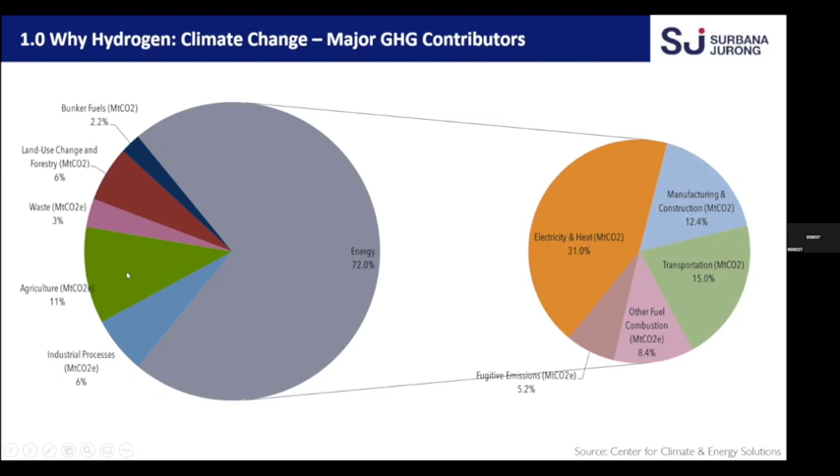Moving forward, if you see the GHG breakdown, most of the energy is consumed by industries, and within industries - sorry, one second. Okay, most of the CO2 is generated from industries basically, and then also a little bit from agriculture, which is also a significant amount of CO2 being generated from the agriculture side as well.

If we leave the problem like this, CO2 generation will keep increasing, and by 2050 we will be in a position to reach up to 50 gigatons of CO2 equivalent, which will exceed the 1.5 degree temperature rise we are targeting for. So hence we need to be below that. What we need to do is take more greener options to lower CO2 emissions.

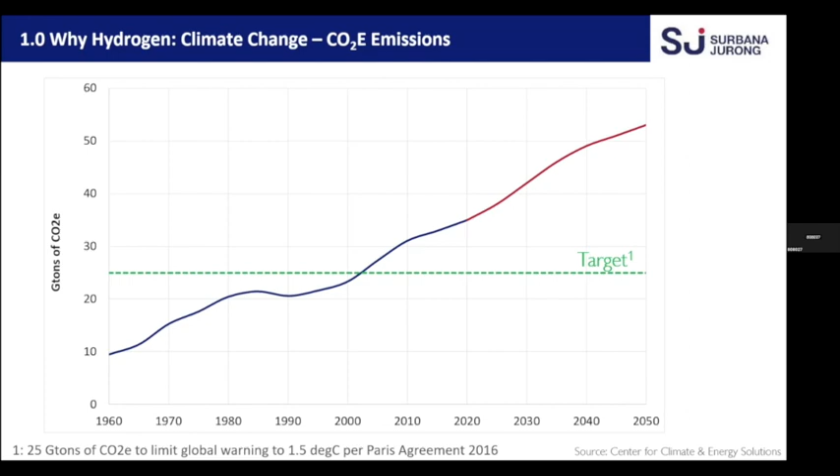How can we do that? We can reduce dependence on fossil fuels, shift to zero carbon sources - mainly solar, wind, batteries, and so on. We can also use energy efficient technologies, minimize the use of energy - basically optimize the use. For example, nowadays people carry a couple of cell phones; instead of that, you can carry one. So we have to be using energy more diligently. Then we can also use carbon capture and storage solutions to overcome the problem.

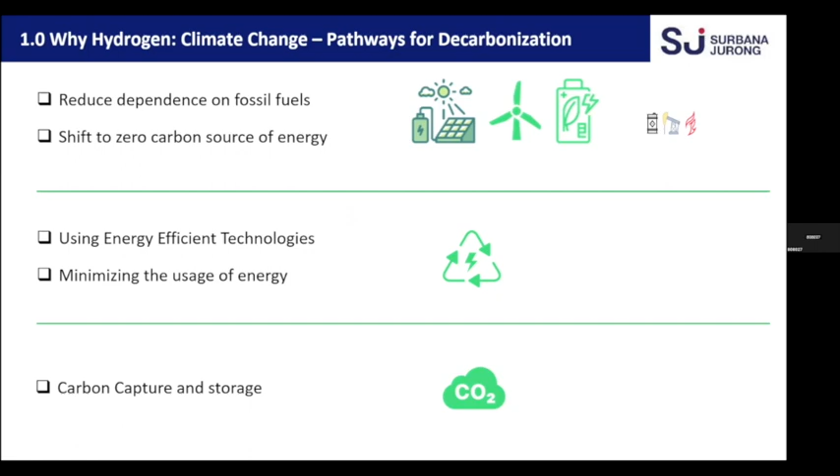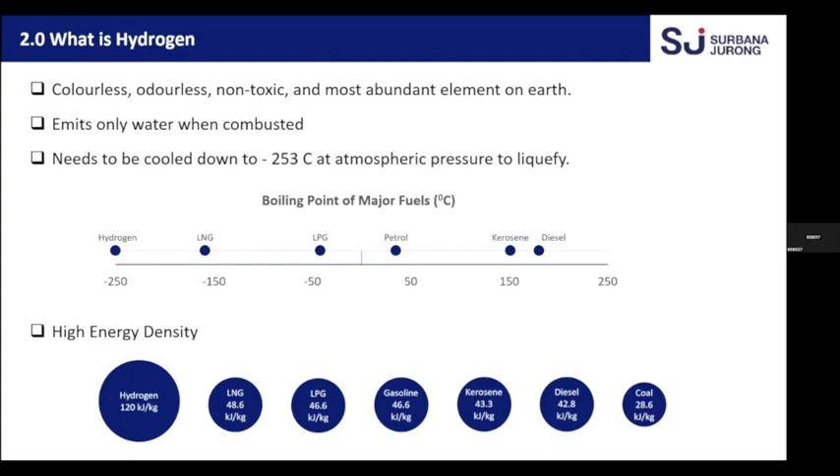Next is, what is hydrogen? Hydrogen is colorless, odorless, and non-toxic, abundantly available on Earth. It only emits water when combusted, and it needs to be cooled down to minus 253 degrees Celsius at atmospheric pressure to liquefy it. Typically, hydrogen has a high energy density compared to LNG, LPG, and even coal. However, because it is very light, you need much higher volumetric flows to achieve the same amount of power production.

So hydrogen demand, mainly, I have classified into 4 different sectors. One is transportation, which Michelle will be talking about. The second is chemical and industrial applications, stationary and power generation applications, and then integrated hybrid energy systems. You can see which areas will be driving these needs - for example, in chemicals and industrial applications, cement and steel industries are bound to take it up, along with industrial heat and biosynthetic fuels. From the power generation side, we see hydrogen combustion and reversible fuel cells coming up. We can also look into integrated or hybrid energy systems - nuclear or hydrogen hybrid, which gives a much greener solution, and hydrogen blending into natural gas systems and so on.

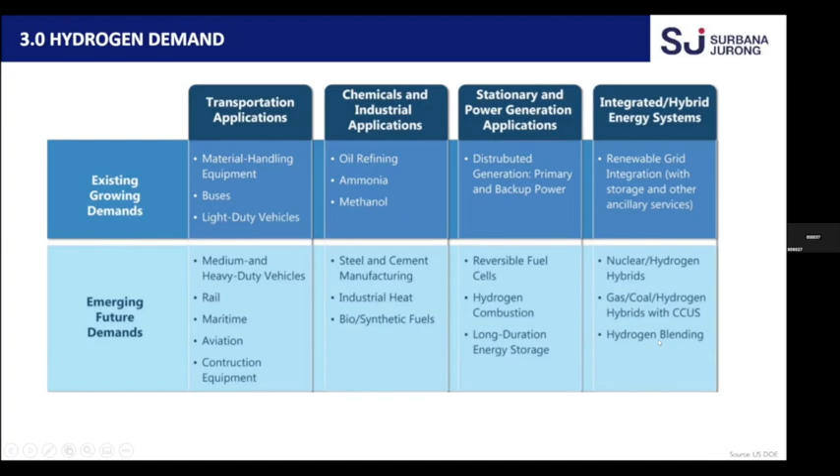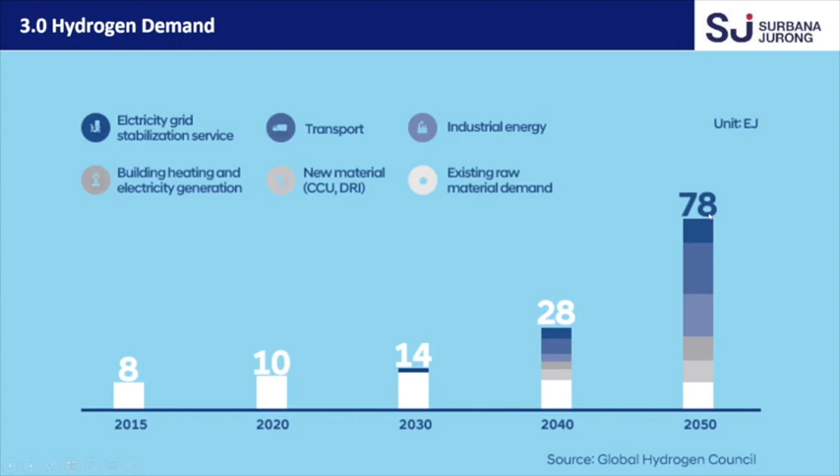You can see in 2015, this demand projection given by the Global Hydrogen Council - initially it was around 8 exajoules, which is 10 to the power of 18. It is expected that consumption will increase from 2015 to 2050 by roughly more than 9 times.

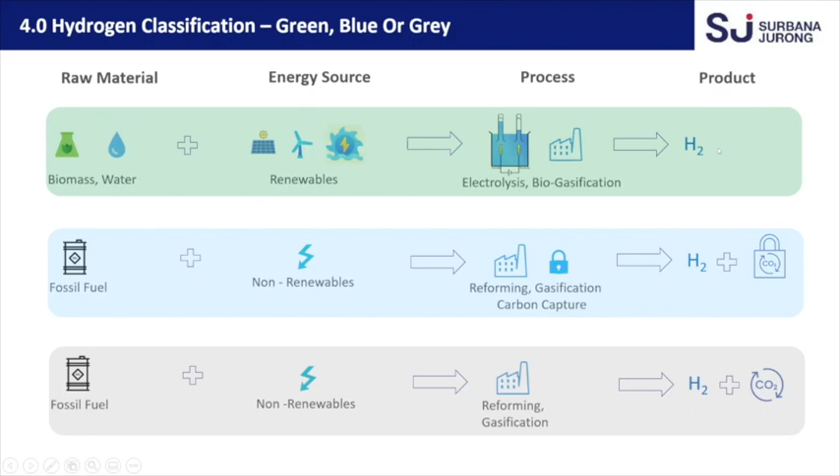Then hydrogen storage, whatever hydrogen you have generated, we can store it as a product, which is liquid hydrogen or compressed hydrogen. Or we can also generate ammonia or LOHC, or even look into adsorption on solids.

And the fourth one is hydrogen transport. Hydrogen can also be utilized for hydrogen transport challenges, which is liquid hydrogen carried using ships, tankers, trucks, and pipelines.

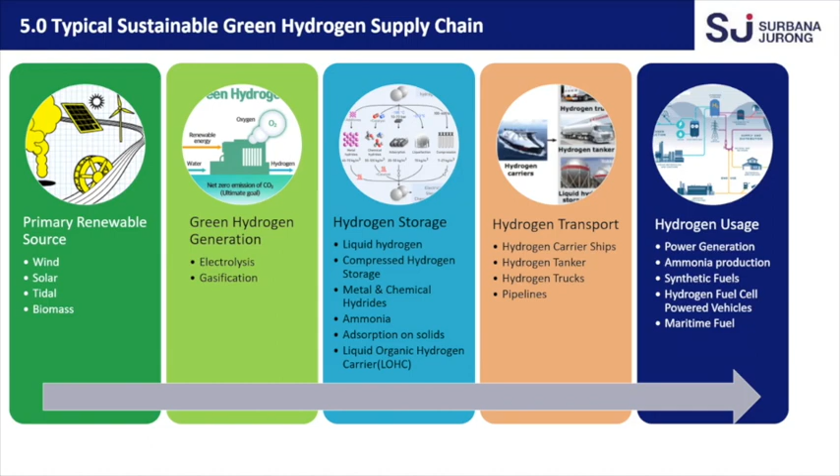The last one is hydrogen use, which is power generation. Hydrogen can be utilized for power generation, ammonia production, synthetic fuels, or marine fuels, and so on.

So if you see the current hydrogen production trends, it is mainly developed from SMR and also naphtha reforming, and you will see some percentage from coal gasification and very little on electrolysis.

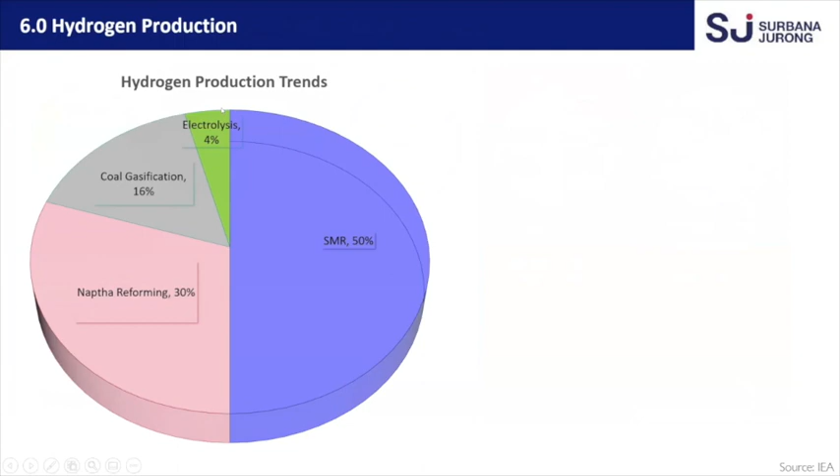But for us to move to green hydrogen, the green part that you are seeing here, which is electrolysis, needs to be a bigger one.

So this is also one of the data which I picked up from an IEA. This is where you will see the cost of hydrogen production when using power from a grid can be almost nearly $5 per kg of hydrogen. And when using renewable energy, it can be lowered to nearly 3.

And when using natural gas without CCUS, it's also around 2.5 or 2.2. Then with natural gas and CCUS, it's slightly nearly $2.5. So this all again depends upon location and where you want to put this plant. There's quite a lot of factors associated with it.

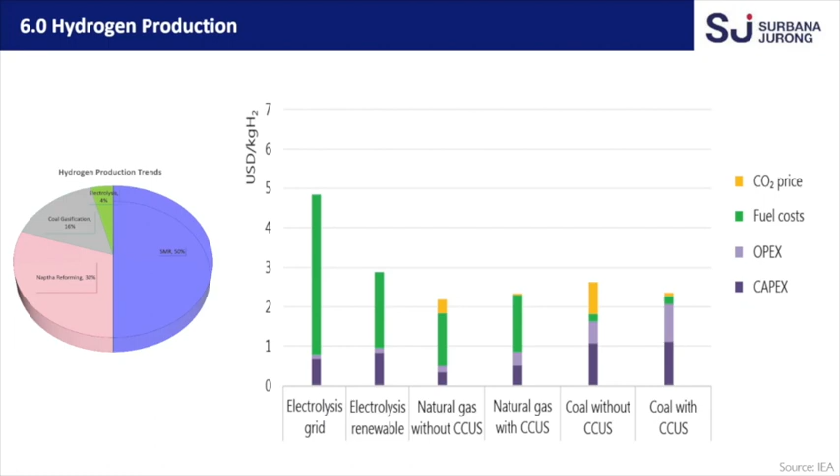Here are the differences between blue hydrogen and green hydrogen. You can see that by 2030, people are expecting that most of the hydrogen source will be more than half from blue hydrogen, whereas green hydrogen tends to start and increase. By 2030, blue hydrogen is also almost 3 times.

This first one is a planned scenario. The second one is a transforming scenario, meaning this is more optimistic, and this is a pessimistic scenario.

So here you can see it can go as big as 3-fold, and even the green energy started building up. By 2050, the pessimistic scenario stays at the same level, but there will be a slight increase in terms of blue hydrogen. Whereas the optimistic scenario, green hydrogen can potentially go to almost 6-7 times the planned scenario.

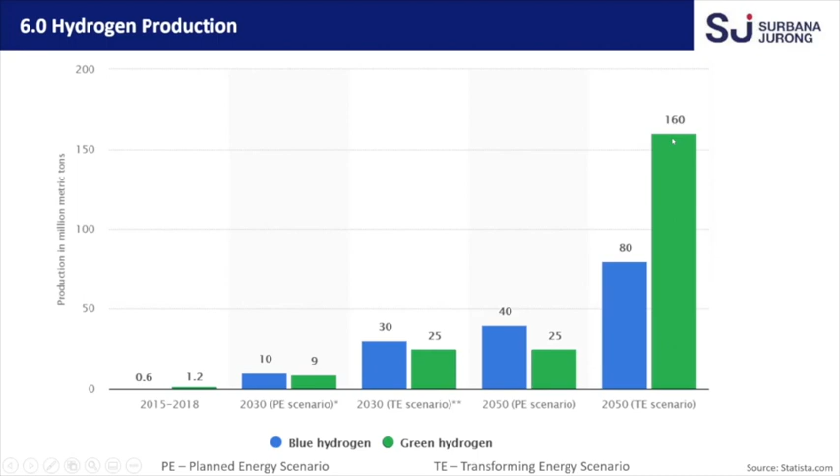Green hydrogen mainly comes from electrolysis of water, or also biomass or waste gasification, whereas blue hydrogen comes from natural gas conversion with CCUS or coal gasification with CCUS.

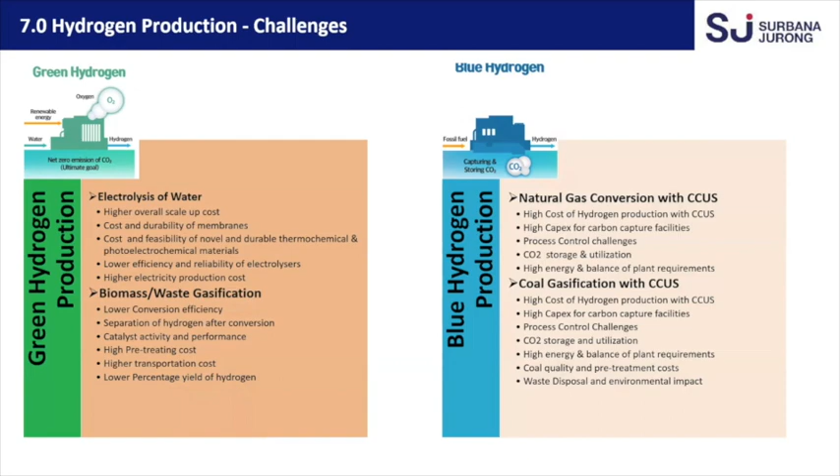What are the key challenges? Currently, hydrogen technology, in terms of storage, faces quite a lot of challenges, because storage tank sizes are limited to 2,000 to 10,000 cubic meters only, because vendors are not yet available to produce at the scale equivalent to LNG, which is around 180,000 scale.

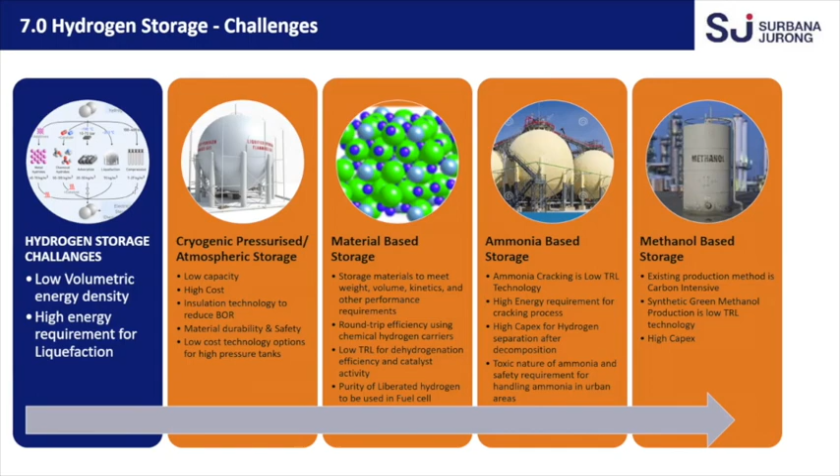Then we have hydrogen transport challenges, the same thing. Ships to carry such a huge amount of hydrogen are not yet in place. Only quite small amounts are being transported from Australia to Japan currently, and we foresee that there's still around 5 to 10 years to come to the level where large volumes will be transported at a bigger scale.

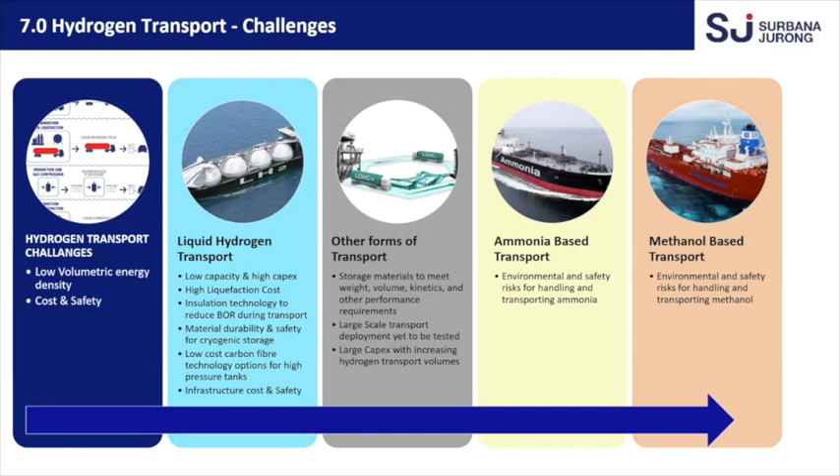So quickly to summarize, hydrogen can be utilized for power generation in CCGTs. The technology for CCGTs using 100% hydrogen is being tested now, and it will be commercially available from 2025-26 onwards from various vendors.

Then we are also looking at fuel cells for vehicles. Although the technology is quite mature, the capex and footprint are still some of the challenges for vehicles.

On the maritime side, the cost of hydrogen is quite high, so maritime is not quickly coming up with this type of solution. Even for storage and transportation, it is quite challenging.

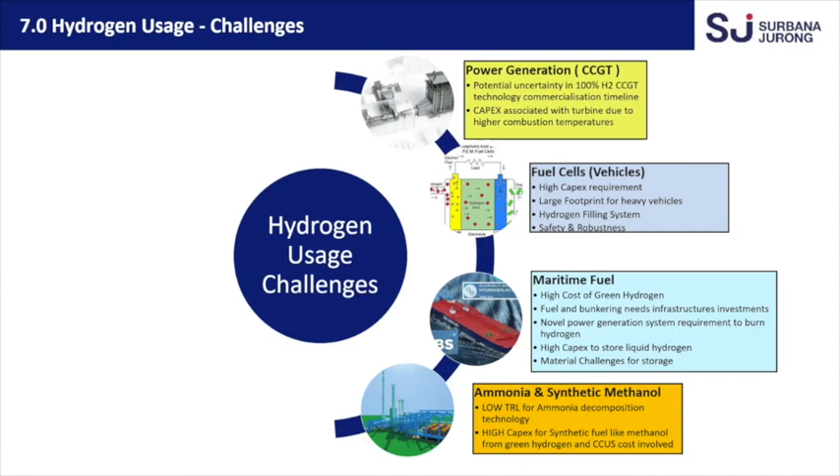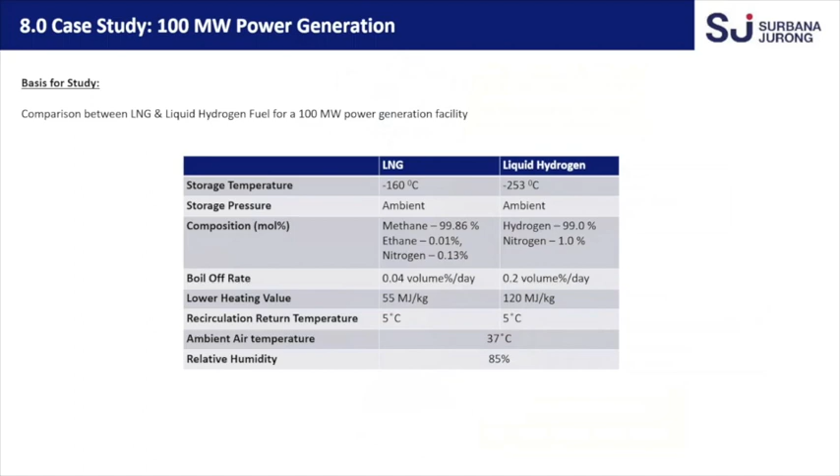A quick case study we have done: a 100 megawatt power plant, in which we looked into the jetty infrastructure required, the storage requirements, recirculation, high pressure pumps, vaporization, and cold energy harnessing, and then the CCGT powering up green data centers. This is a project we have conceptualized.

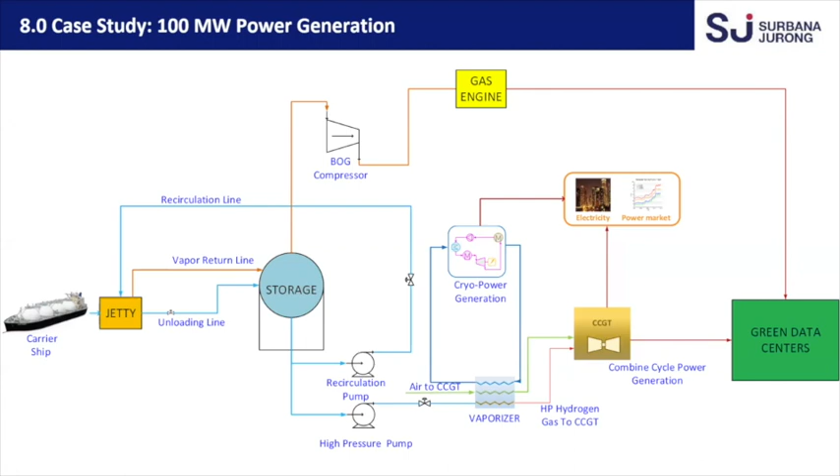The storage volume required to achieve the same 100 megawatts via hydrogen is almost twice that of LNG. And the cold available with liquid hydrogen is quite higher than LNG, because of the very low temperature of minus 253 degrees C.

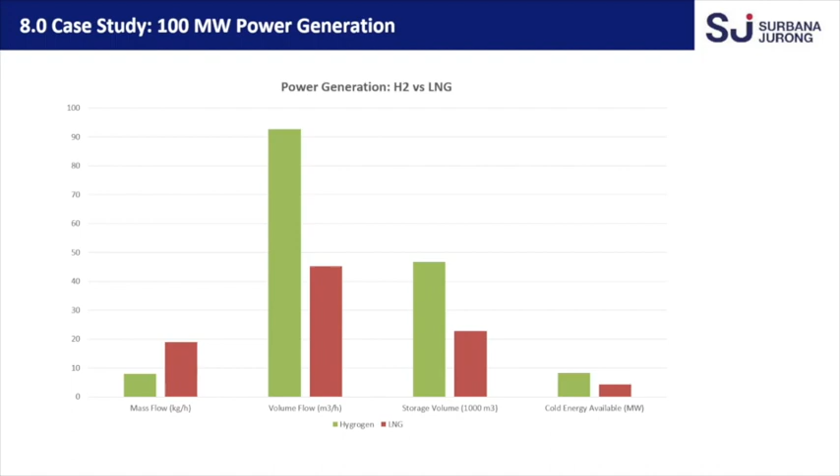This will give a good idea: let's say one ship of LNG carrier of 160,000 meter cube - this is equivalent to roughly 2.5 ships of LH2, liquid hydrogen, comparing the energy equivalent to one ship of LNG. This is also equivalent to 1.75 ships of ammonia. This is an equivalent comparison.

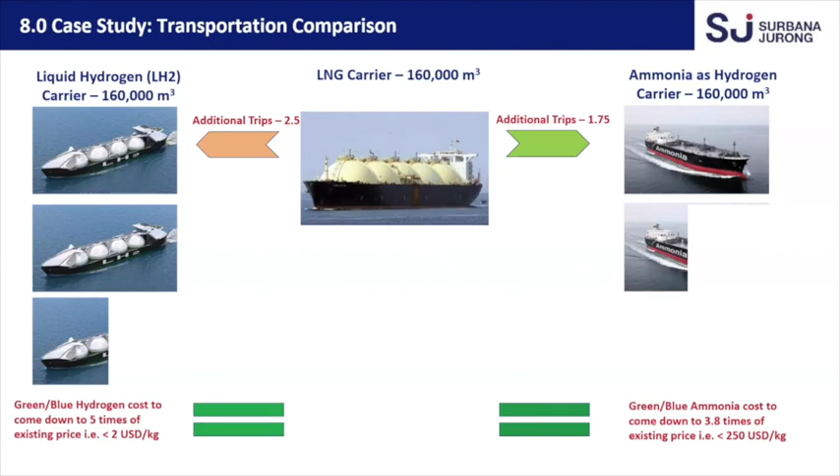Process safety considerations: we believe hydrogen comes with quite a lot of process safety issues. It's highly flammable, but burns with an invisible flame, and has a wide range of flammability - it can explode between 4% to 74%, quite a wide range compared to natural gas at 5 to 15.

We need to ensure wherever you are storing and handling, you have adequate ventilation. You also need the right purging requirements - helium gas is recommended over nitrogen. For example, for any refinery or natural gas plant, we use natural gas as fuel gas or nitrogen for purging, but here you need helium.

What are the hazards associated with hydrogen? Fire hazard, explosion, asphyxiation, and cold burns because of very low temperature. The most effective and efficient way to fight hydrogen fire is to ensure the facility is designed inherently safe to shut off the flow of gas, and use dry chemical powder to extinguish the fire.

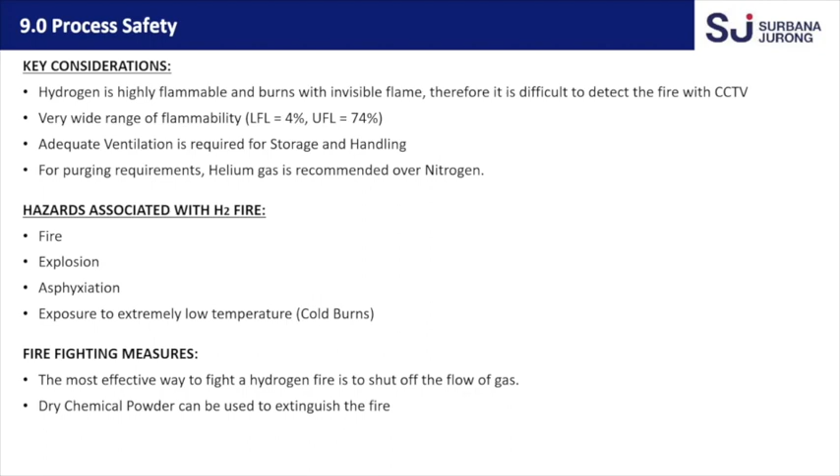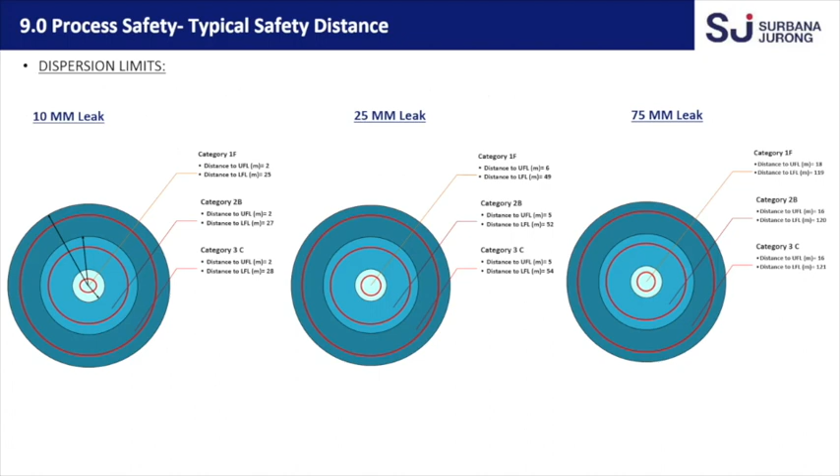We have also looked at dispersion analysis, done with a 10mm leak, 25mm leak, and 75mm leak to see the safety distances or HSSC buffer zones needed. We see it can go as low as 2 meters to 120 meters - almost similar to LNG, because hydrogen being lighter, the flow is going vertically upwards.

Thank you, I will be taking questions later.

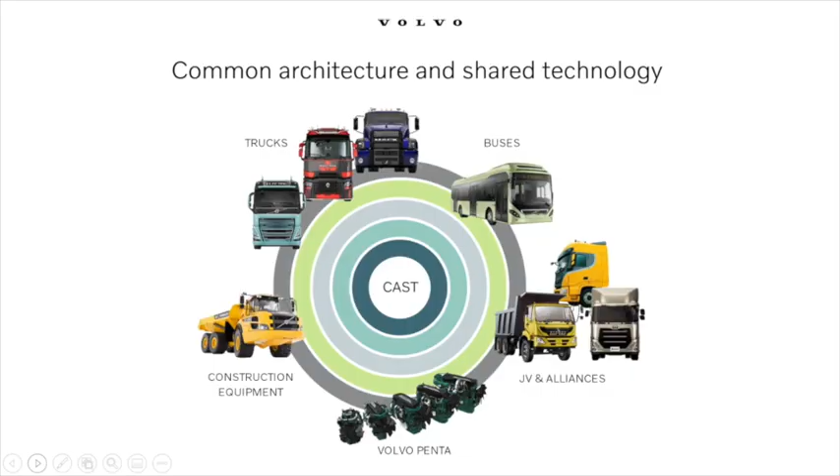But certainly hydrogen and fuel cell technology is going to play a strong part in our business as we go forward. We're not a latecomer to the zero emission electric vehicle space, kicking off in 1995 with concept trucks and buses, through to production start of electric buses and trucks in 2022. But I'll touch on our roadmap journey shortly into the hydrogen and fuel cell side of things.

But as far as inter-regional haul goes, heavy transport, heavy line haul, longer distances, and limited access to infrastructure for recharging and refuelling, we certainly see the fuel cell electric vehicle playing a very strong part there for our organisation. We also see potential down the road for hydrogen to be used in internal combustion engines as well, for extremely heavy duty applications.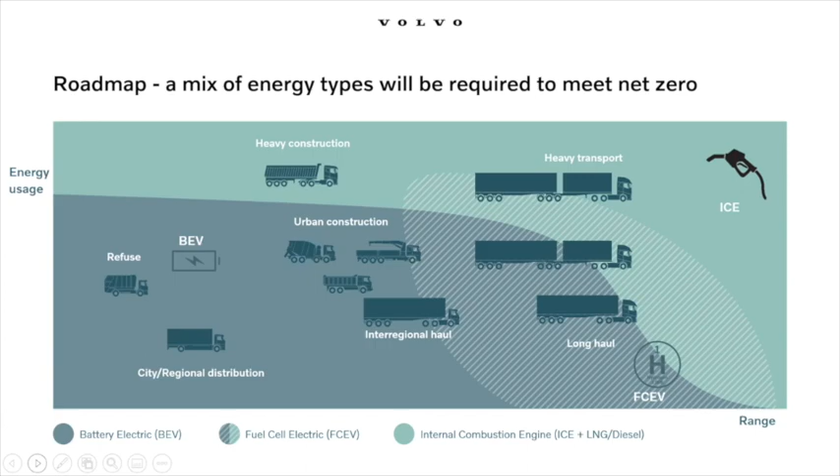That's where heat and weight aren't your friend when you're trying to package up the hydrogen fuel cell tanks and infrastructure onto a chassis to meet particular needs. So we also see internal combustion continuing to play a part hand in hand with new technologies around hydrogen. This is a basic overview of where we see our planning and requirements as we go forward in the long haul, inter-regional, heavy transport space.

We can't package enough batteries on our trucks for interstate transport — it just makes them far too heavy. They won't meet ADR requirements, and they won't carry much of the goods that need to be carried around the country. So really it's the fuel cell vehicles that are coming into play now and into mind.

We project that in that greater than 76 tonne mark, we'll be able to deliver a prime mover onto Australian roads that can go around 800 kilometres, which is around where the requirement's going to be for interstate and intrastate operations. That's really where the sweet spot's going to be — East Coast line haul, B-double running, and other operations around that as well, milk cartage and the like, as outlined here.

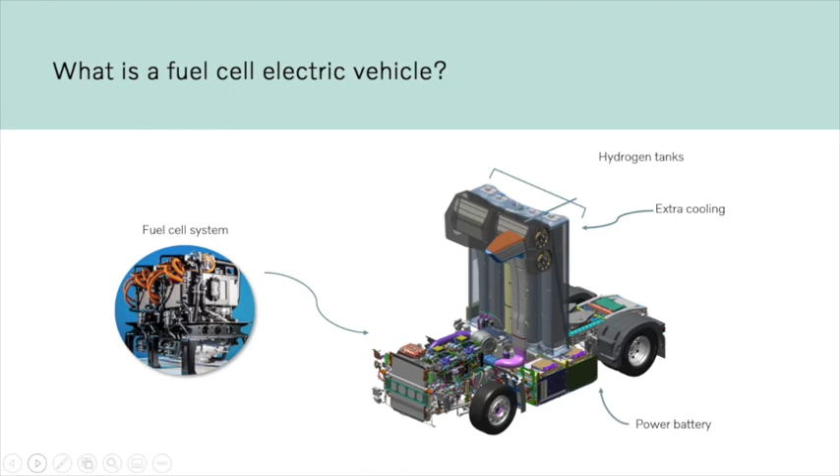And also, we need to be addressing any safety concerns as well. It's a highly flammable gas, which obviously requires extremely careful handling to ensure safe outcomes as we move forward, which our operators and business partners will always expect of Volvo. It's extremely exciting, though it's highly expensive to be developing these technologies for a global market.

So Volvo has joined forces with another heavy automotive behemoth, the Daimler Group, I'm sure you're all aware of. We've joined forces for an organisation that we are joint owners of, 50-50, called Cellcentric. It's based in Germany, and our joint venture is, for both organisations, accelerating development and commercialisation of hydrogen and fuel cell systems for use in heavy trucks, buses, marine applications, stationary applications, and all other manner of things, which is extremely exciting for our organisation.

We are seeing more and more now large organisations like Volvo and Daimler sharing development costs. It is quite prohibitive to be developing multiple different new technologies at the same time, and both companies are also working on their battery electric technologies to deploy across the globe. So making these sharing arrangements becomes quite interesting, and at the moment, as it's rolling out through Europe, it's also quite strategically important for us.

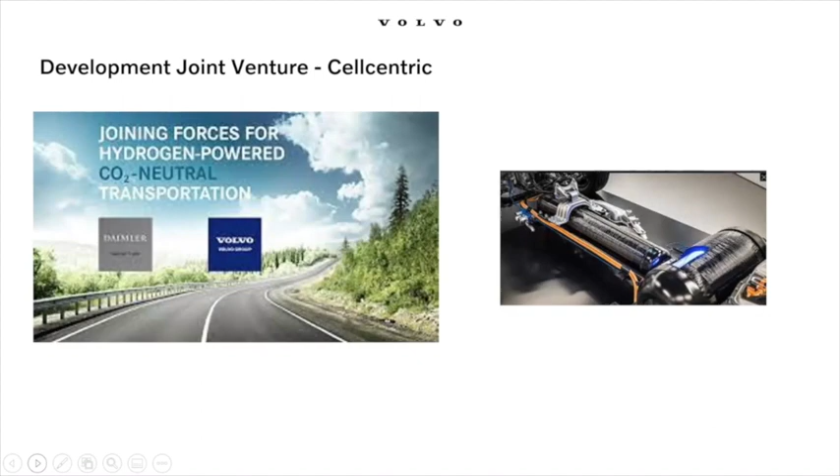We do see this joint venture contributing to the development of not only safe, sustainable, high-quality product, but also contributing to developing the refuelling network, as I mentioned. And of course, why? It's really contingent on organisations like ours. We've been part of the problem for a long time with regards to mass heavy-duty diesel engines and vehicles on the road. So it's really contingent on companies like ours being part of the solution for the future generation challenge. It's a highly competitive space at the moment, but if you like competition and enjoy seeing the evolution of the industry, it's a fascinating place to be part of, which is excellent.